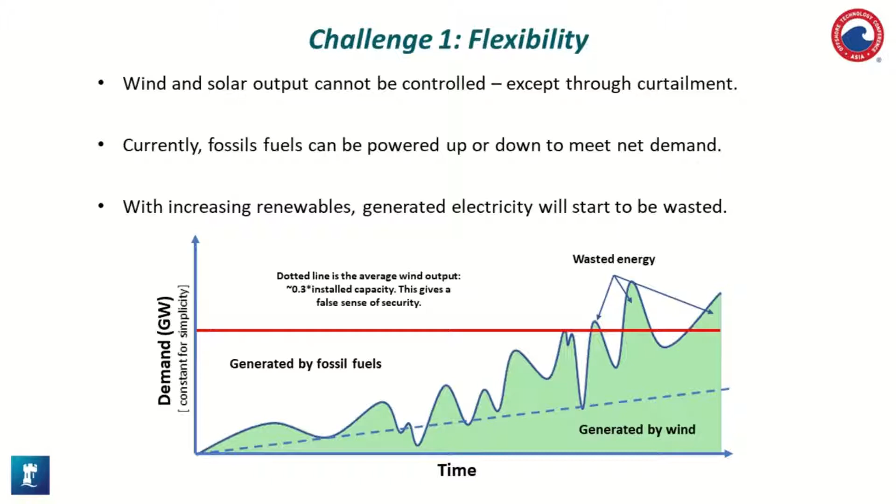And when you look at the peak output of wind rather than the average output, this will start happening sooner than simple calculations might initially predict. While there are several possible solutions to this problem of inflexibility with renewables, the one we're going to discuss today, and possibly the most commonly discussed one, is energy storage.

While inflexibility is perhaps the largest problem facing offshore renewables in the future, there is also the problem of capture value. Capture value is a measure of how effectively a wind turbine can achieve its average electricity price over a time period. With low or little penetration of wind into any grid, this capture value is essentially 1, because wind availability is not affecting the electricity price. However, with high penetrations of wind, this capture value is set to go far below 1, and this is where many countries are headed as wind penetrates further into their grids, especially places like the UK.

Now, of course, a lower capture value means higher risk and lower profits for a conventional wind farm operator, as times of high wind are going to be increasingly associated with times of low electricity price. And this could result in lower wind investment in the future.

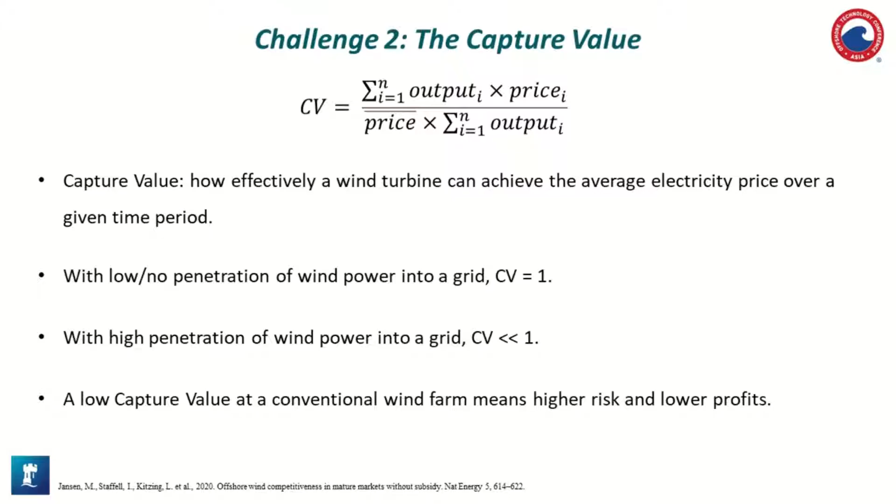As I previously mentioned, one of the core solutions to the problem of inflexibility with renewables is energy storage. Predictions for high penetrations of renewables in future energy grids imply that very large quantities of this energy storage are going to be required. Some predictions imply over 300 terawatt hours in Europe, for example.

To date, much of the research into energy storage has been focused on mid-grid or standalone storage. This means that electricity is generated by some renewable source before being converted into some storable form, like chemical energy or compressed air, for example, and then converted back into electricity as required. However, another set of solutions can be described as Generation Integrated Energy Storage, or GIES.

GIES systems convert this initial energy into its storable form before it's ever used to generate electricity. Now, a simple example of this is natural hydropower, where river water is stored in the form of potential energy in a big reservoir, and then it's used to generate electricity in turbines.

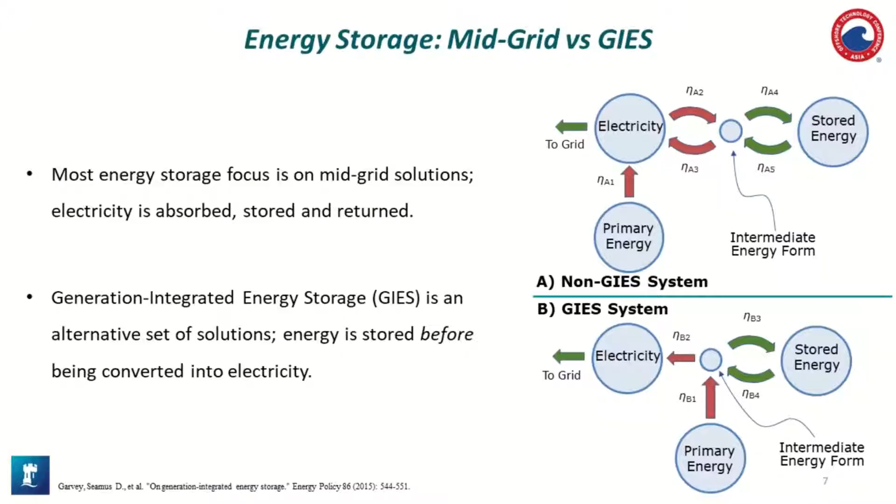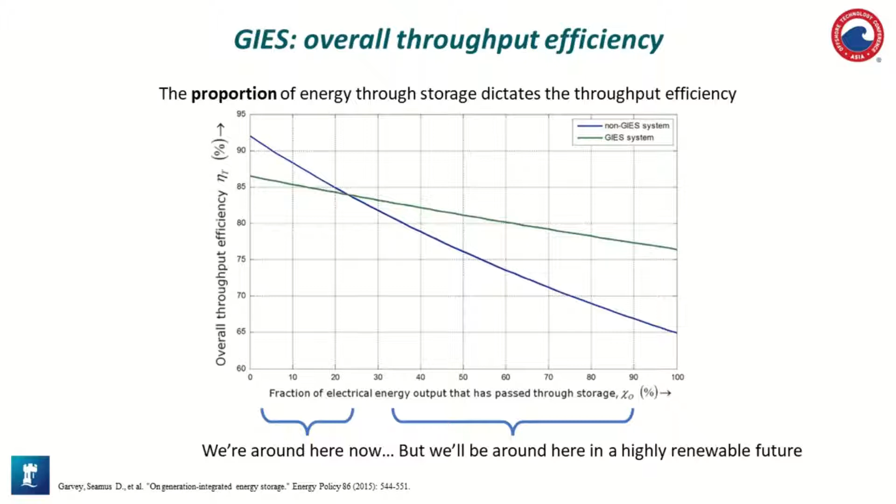Of course, the other side of this coin is that if you're passing very little energy through storage, the conventional turbine is likely to perform better overall, as it likely has a slightly higher pure transmission efficiency, and very little of that energy is actually passing through the relatively low efficiency storage. Currently, of course, we're looking at the lower end of this graph with current energy grids, but we can expect that to change, and very soon, if we're looking to greatly increase renewable penetration into the grid.

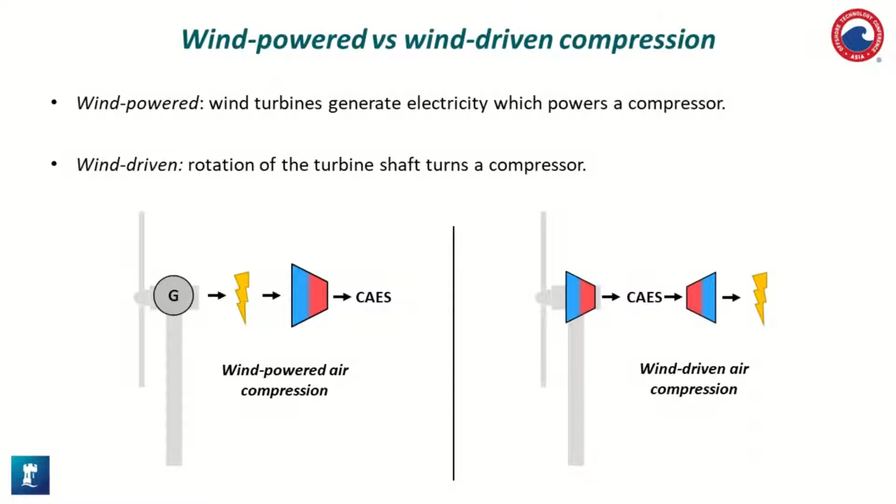Now, as the title of this presentation might suggest, our project utilizes air compression, and I like to use two terms with regards to air compression, and these are wind-powered and wind-driven. Wind-powered compressors are those that utilize the electricity generated by conventional wind turbines to compress air, whereas wind-driven compressors are powered directly by the rotation of the shaft of the wind turbine itself. Wind-driven air compression can therefore be used as part of a generation integrated energy storage system as long as that compressed air is stored before being expanded to generate electricity.

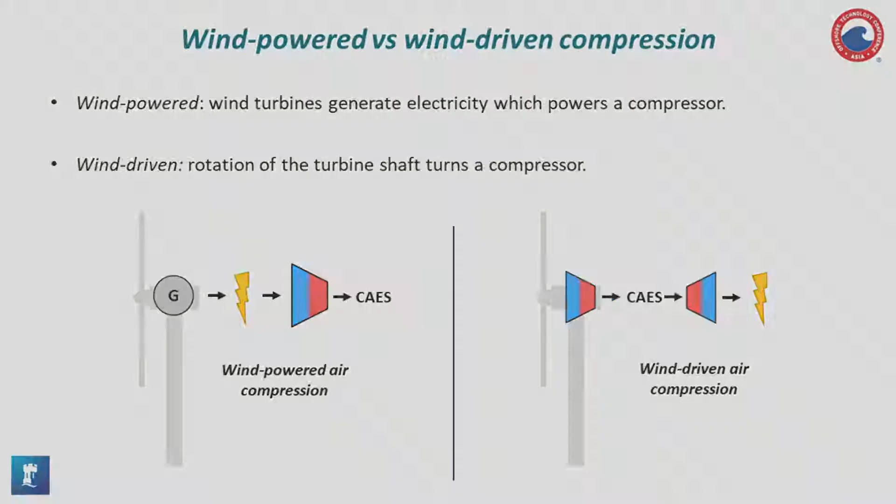And now for an overview of the system itself, which we have named Wi-DACIS, standing for Wind-Driven Air Compression and Isobaric Storage. Wi-DACIS can provide flexibility to floating offshore wind turbines in the form of underwater compressed air energy storage, as well as some thermal energy storage. Energy can be stored when wind availability is high, but electricity price is low, and then released when electricity price is high, but there is little or no wind. The system utilizes the hydrostatic pressure available in deep water to store this compressed air in cheap, flexible energy bags.

Wi-DACIS has been designed to be direct drive. The gearbox is replaced with a high-efficiency, slow-speed compressor, and the generator is moved onto the floating platform itself. The inlet air is first compressed to some intermediate pressure by an electrically driven compressor. This is done to account for the large intake swept volumes required by a direct drive machine, which I will discuss in more detail on the next slide.

The wind-driven compressor could be designed to be either isothermal or adiabatic. That's the main compressor inside the wind turbine. In the case of an isothermal compressor, the packed gravel bed thermal storage wouldn't be necessary, but we found it to be a fairly cheap form of storage anyway. We have investigated both configurations and we'll discuss that a little later in the presentation in the results.

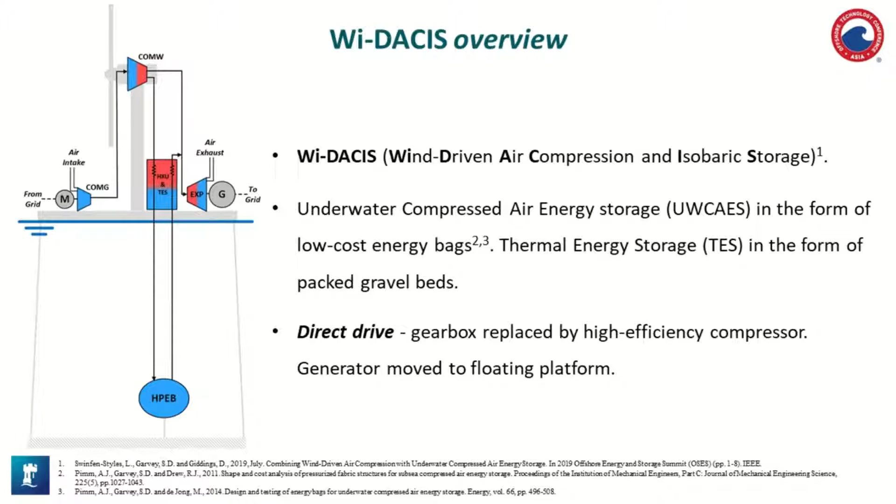Now, there are several solutions to the problem of intake swept volume, but the solution chosen for the Wi-DACIS system is to increase the inlet pressure of the air being compressed by performing some prior compression with a smaller electrically driven compressor. Of course, if this smaller compressor is powered by the grid, and we're assuming that it is for the time being, then Wi-DACIS is only partially a GIES system, as some electricity is being converted into a storable form of energy before being converted back into electricity.

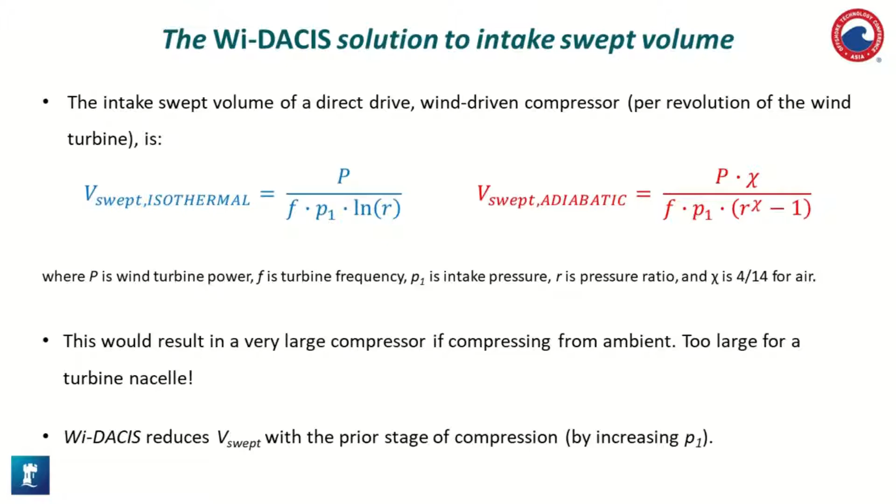However, and we'll see this in results later on, it is preferable to design the system such that this electrical compressor is only a small fraction of the overall system power, just enough to feed the wind-driven compressor with medium pressure air. There is also a benefit to this solution with regards to the capture value problem, and I'll discuss that in a little bit towards the end of the presentation.

In order to get some sense of whether Wi-DACIS could be an economically viable system, we've simulated a number of iterations of the system over a year of real wind and electricity price data. We've used a price matching algorithm to optimize store operation that assumes perfect foreknowledge, but algorithms can be found that achieve similar results without this assumption.

We've considered both isothermal and adiabatic wind-driven compressors because, of course, there are potential benefits to both from a design perspective. The electrical compressor itself, the first stage of compression, is isothermal in all cases. Now, for clarity, isothermal means that there is no temperature change, the air doesn't heat up, and adiabatic means that there is no heat transfer. The air does heat up, and none of that heat is lost or removed during compression.

We created iterations of the system by setting a reference wind turbine, a Vestas 8 megawatt wind turbine, and varying the inlet swept volume and store size of the system. This resulted in different total system powers, as the electrical compressor changed in size, but our main metric, which was the return on investment, is insensitive to this regardless.

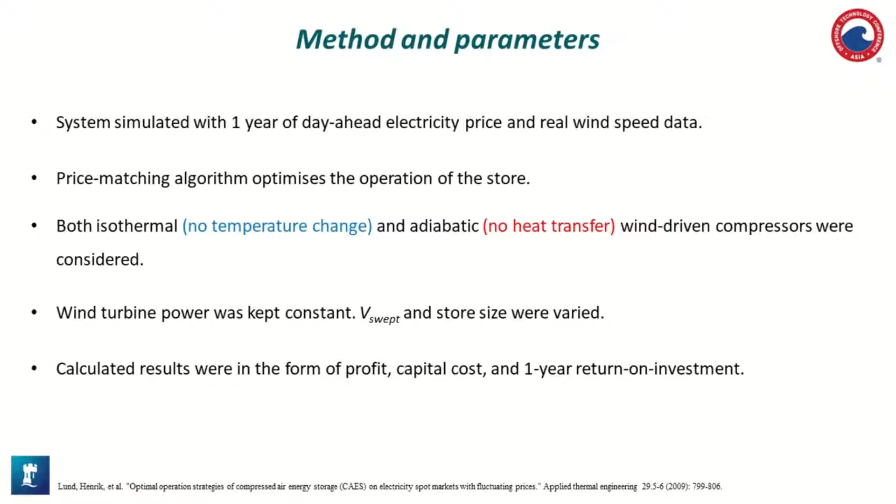It is interesting to see how varying the swept volume, which is essentially the same as varying the allowable inlet pressure of the wind-driven compressor, changes the ratio of pressures in the two compressors. As I've previously mentioned, it is preferable to reduce the power of the electrical compressor, and this can be done by increasing the swept volume of the wind-driven compressor. The system that utilizes an adiabatic wind-driven compressor can achieve much higher power ratios between wind-driven compressor and electrical compressor, which makes sense, of course, as extra work is done into heating the air.

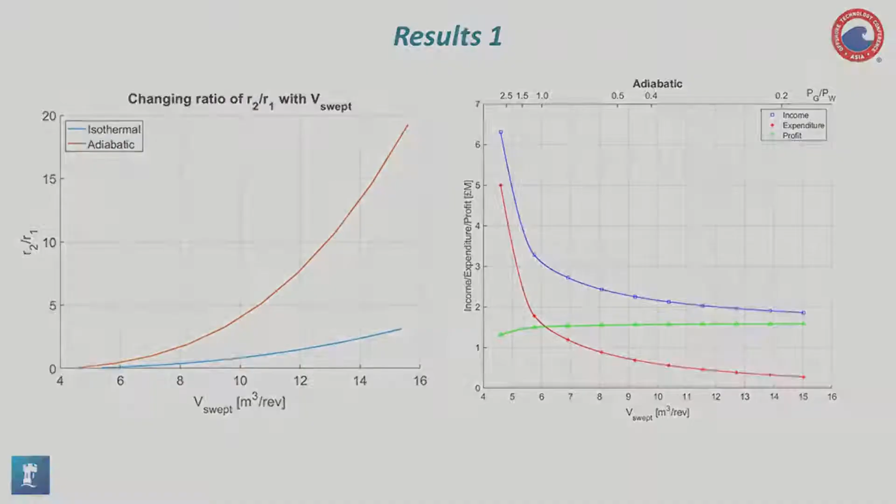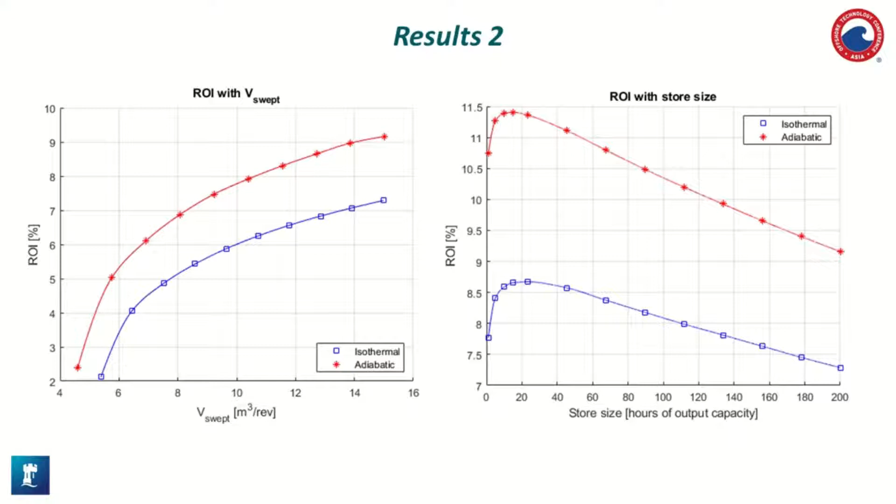Now, these two figures show the 1-year return on investment values for the system as swept volume and store size vary. Again, designing for high swept volumes is clearly good for the system. It's interesting to note that there is an optimal store size, around 15 to 20 hours of output capacity. This is probably due to the additional compressor machinery giving little benefit of flexibility at low store sizes and storage costs dominating at larger store sizes. You don't see this optimum in the simulations we performed for wind with standalone stores, as there's no initial extra cost of machinery compared with a conventional turbine when there's no energy store.

At 15 to 20 hours, Wi-DACIS is competitive with conventional CAES storage, and seems to perform significantly better than the relatively expensive lithium-ion option. Of course, in the current energy grid, you'll get more bang for your buck by simply using a wind turbine with no storage. Storage is expensive, and offshore wind is getting cheaper by the minute.

However, this will change as wind penetrates further into the energy grid and the capture value of wind power reduces. Integrating energy storage with wind in some form will become increasingly appealing to the operators of new wind farms.

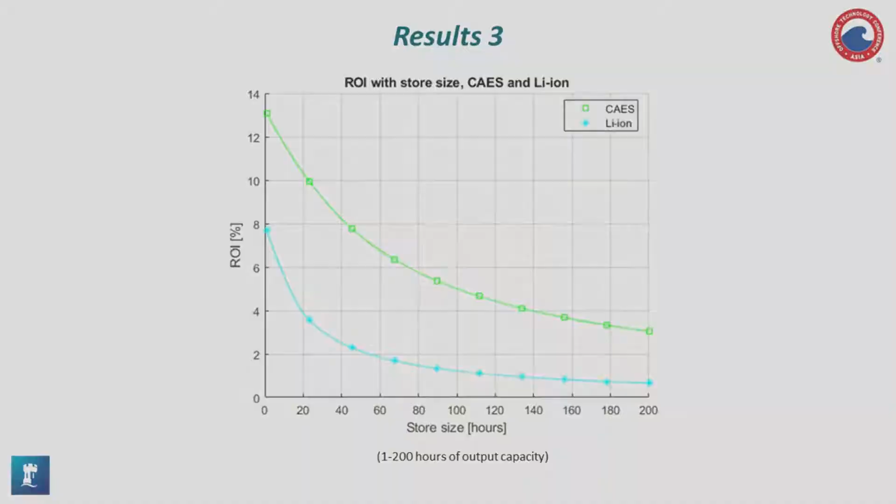This leads us nicely to how Wi-DACIS itself addresses the capture value problem, and could do so more effectively than most wind energy storage solutions. Of course, any local energy storage is providing some flexibility and allowing operators to sell this energy at a more favourable price. Wi-DACIS does this too. However, Wi-DACIS also draws electricity from the grid, and it does so at times when wind is high, as it's needed to feed the compressor.

Given that times of high wind will increasingly be associated with times of low electricity price, the cost of running this compressor is expected to reduce. But more than this, by providing negative supply, i.e. demand, during times of high wind, Wi-DACIS could provide a significant balancing service to the capture value problem, not only for itself, but also for any system in which it plays a significant enough role.

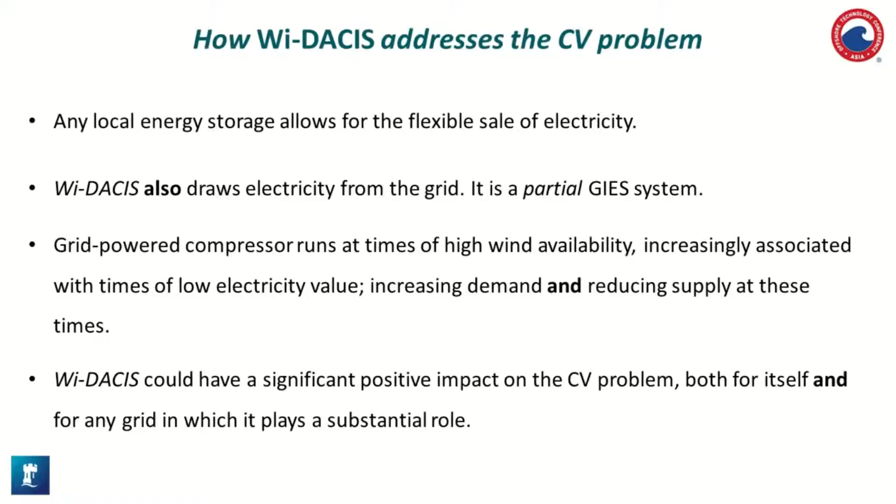So, with all that in mind, what work needs to be done to develop this system further? Well, firstly, I think more costing and exergetic analysis needs to be done. Where are the biggest areas of risk for the system? Are we going to be blindsided by unexpected costs, or find ways to significantly reduce the capital and operating costs of the system? There's also investigation work to be done on two interesting ideas.

The first is the potential for running the first stage of compression with renewables, be it solar, wave, or something else. This would turn Wi-DACIS into a full GIES system and reduce its impact on the capture value, but would also reduce operating expenditure. There's also the potential for a medium pressure air store between the two compressors. This may be required if the first stage of compression were to be powered by something inflexible like solar. It would mean that we could run the electrical compressor more cheaply, but the medium pressure store would likely be more expensive per unit capacity than the high pressure store, so it's a toss-up.

Finally, I believe there is a case to be made for a small-scale demonstrator, especially one that draws from the grid using a free market contract and demonstrates the underwater compressed air energy storage technology. With the initial exploratory work done, Wi-DACIS seems like it has some considerable potential as both a flexible generator and capture value balancer.

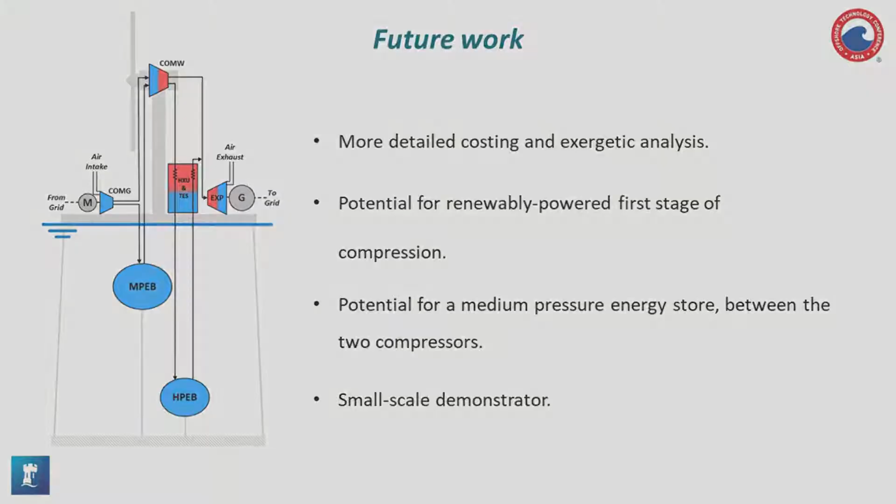Yes, thank you, Laurie, for the excellent presentation. Hopefully, we all understand the situation better, and hope the audience are also ready with some questions for you. Hopefully, easy questions first. Okay, we have a few questions here, and how about we start with something to warm things up?

Okay, the first question here is, what's the relative cost of generating electricity from wind and the competitors? Well, I can only really speak for the UK here, but I think it speaks to the maturity of the technology, even if the market in some parts of Asia is less mature than it is in the UK with renewables. But in the UK, offshore wind is an extremely cheap form of generation,

along with other inflexible renewable generators. In the latest contracts for difference bids, which is how the UK auctions off wind power, the strike prices have been around £40 per megawatt hour. Now, this is comparable with other renewable generators and much cheaper than alternative forms of generation. So the UK Department of Business, Energy and Industrial Strategy has estimated that the levelized cost of energy for offshore wind is around £57 per megawatt hour, and the LCOE is what the government uses to set as a maximum strike price for their auctions.